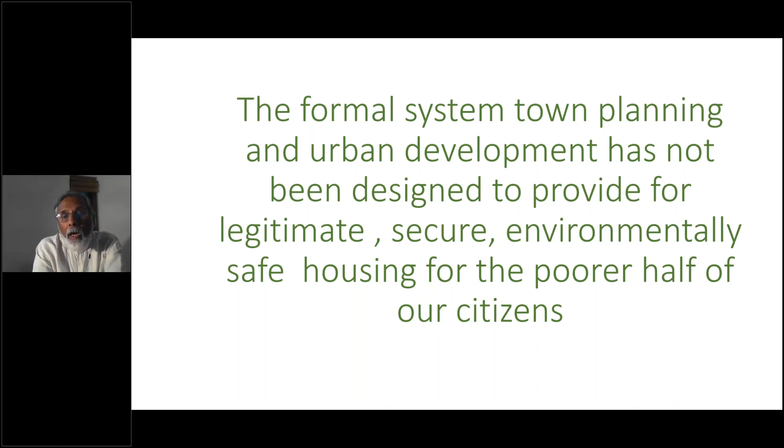Now, what's happened historically is that our formal system of town planning and urban development has not been designed to provide for legitimate, secure, environmentally safe housing for the poorer half of our citizens, a large proportion. And so we say there's a housing shortage. And the issue is, how do you make it affordable for people with very little income?

Most of the shortage in housing, where there's not adequate or proper housing, where people are living in bad circumstances in slums, etc., is amongst the bottom one-third of the economic pyramid of society. And the lowest in that pyramid are the worst sufferers. So here's an issue: you have to reach the threshold of affordability in your solutions. And that's where the bulk of need for housing in our cities still persists.

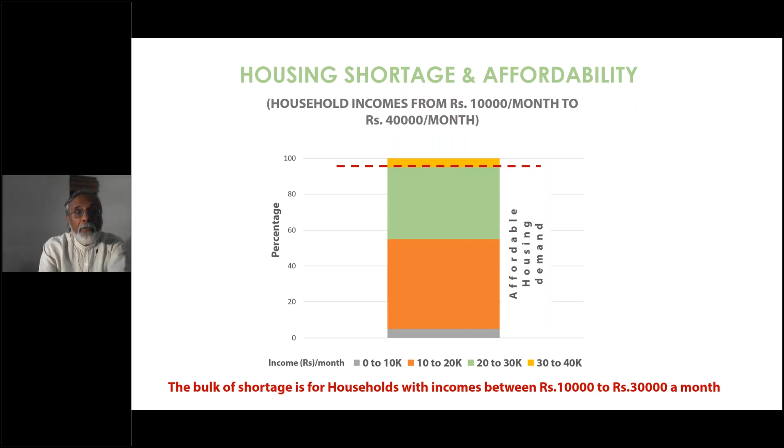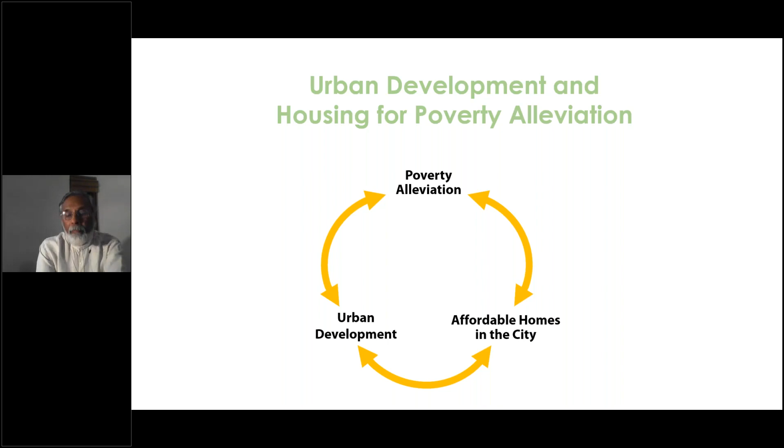Now, let's not forget this. This is extremely important. If we are talking of urban development and housing, the two together are meant to be a solution for poverty alleviation. These are interlinked processes, where urban development, which provides affordable homes in the city, will produce poverty alleviation and greater equity in our social fabric.

Nothing is affordable in housing unless it has an advantageous location and it has a live-and-work affordable shelter provided within the fabric of the city. Once you have that, then you get efficient economic processes, you get a rapid distribution of wealth, and that results in poverty alleviation.

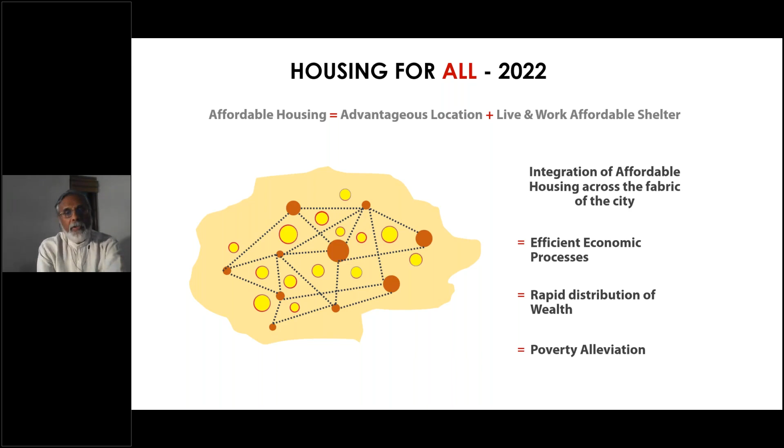So we should now say that if you can take care of the cost of land and building—land is a big issue, I'm not going to talk about that today—and if you can be careful in the use of your resources, whether it is land, energy or materials, and you can make things in a low carbon manner, whether it is the use of materials or the transportation of the city, that is when affordability and sustainability become complementary. That is my assertion. A combination of resource-efficient and low carbon construction with compact urban morphology is what produces affordability, and low carbon city transport produces a low carbon and affordable urban system.

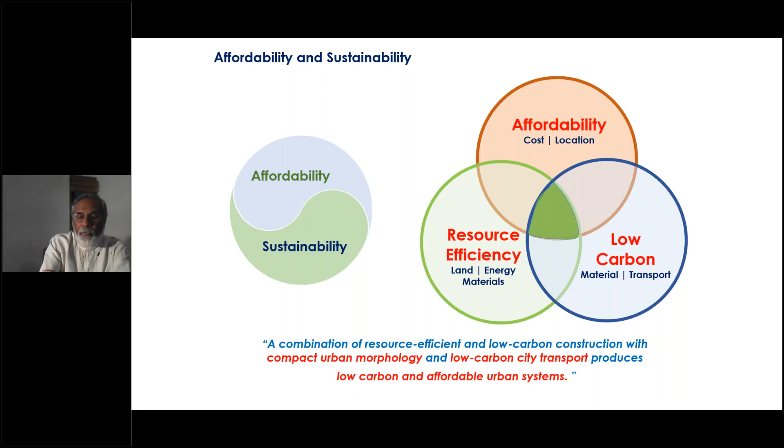Now, there's a big debate going on in our part of the world, and there's a move somehow—people think that we have to go high-rise. Everything has to be high-rise because our land is short, and that's modern. But we thought, oh hold on, let's have a look at that. So we did some research, looking at low-rise affordable housing, medium-rise affordable housing, and even high-rise buildings which are supposed to be affordable, but they're being built in the name of affordability. We looked at real projects and analyzed them thoroughly on different parameters.

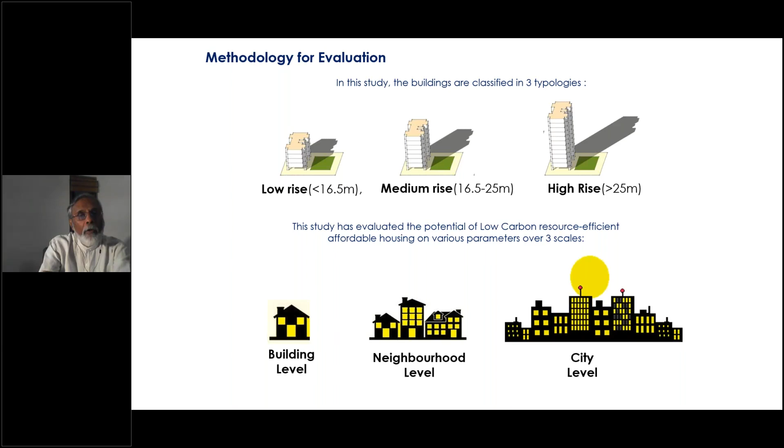So here's an interesting one: if you look at the embodied energy intensity, there are 233 units of embodied energy per square meter in a 4-story or 5-story building, versus 310 units of embodied energy in a tall building, say 12 stories tall. So you can see, as you build taller, you use more steel, you have to resist more earthquake forces, wind forces, and gravitational forces, and it becomes much more expensive in embodied energy terms.

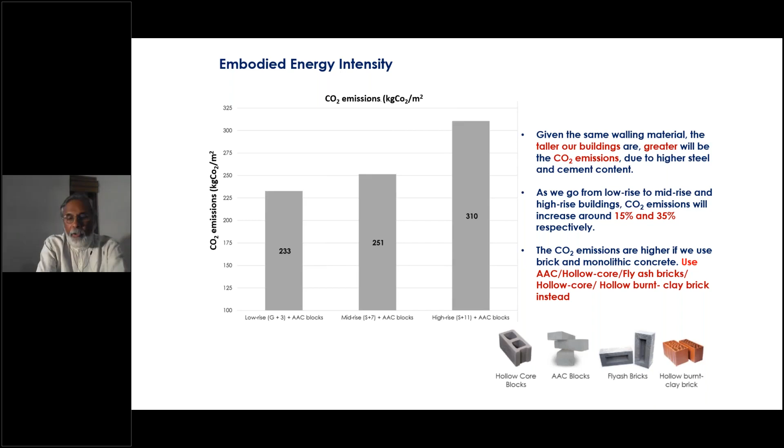Higher carbon dioxide emissions as you go taller. Operational energy—well, as you go taller you become dependent on pumps and lifts much more, and also on fire safety systems. So the cost of operating a building, just to make it work, is 4 to 5 times higher if you're taller, as compared to a low-rise building which is 4 to 5 stories high and walk-up.

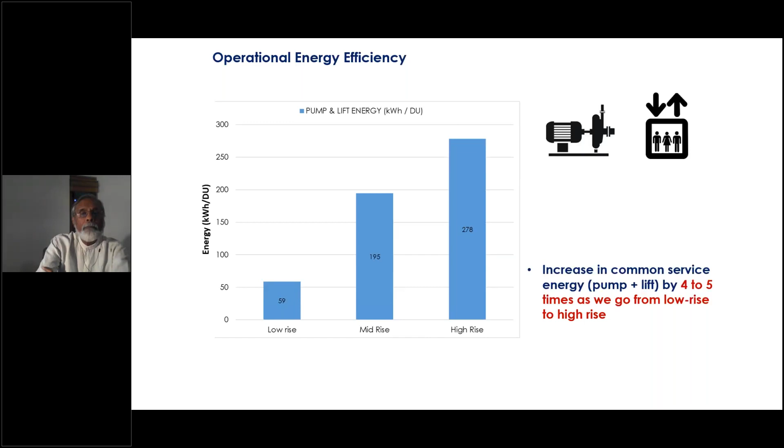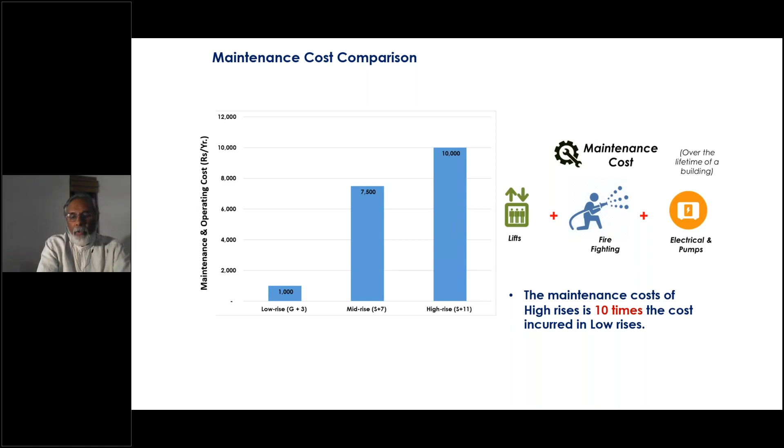So here we are: operational cost of energy goes up, again higher carbon dioxide emissions. What about maintenance cost? Well, as buildings age, you can look after a low-rise building easily, but tall buildings, with all the complex systems and difficult access on the outside of walls and windows, are much more expensive. So maintenance expense is much higher when you're talking about high-rise buildings.

And this is the real nugget: think of 4 to 5 story high buildings with a rooftop which has cleared the tree line and is now open to the sun—plenty of sunshine in our part of the world. Now, the calculation shows that if you can give 60% of your rooftop to solar PV, 80% of your annual energy demand can be met by that solar rooftop PV system.

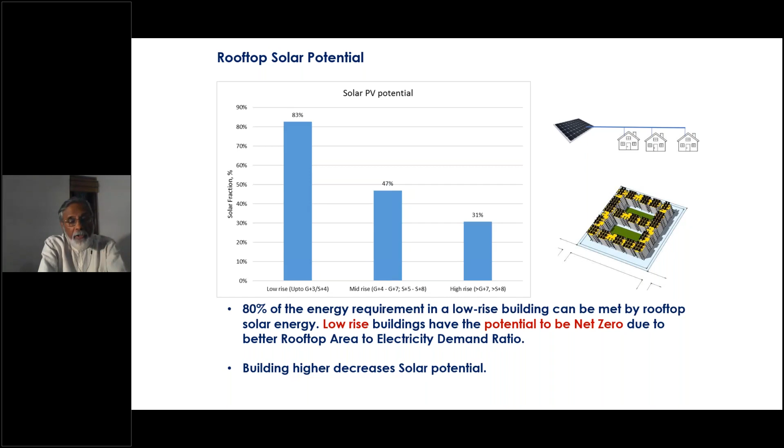And of course, as you build taller and taller, that ratio becomes less favorable. If you go very tall, you can't possibly meet more than 30% of your energy demand with solar PV, and of course your energy demand also goes up as you build taller. So this is a very important thing—it's a hint that here's an urban fabric, 4 or 5 stories tall, clearing the tree line, giving access to solar energy production, solar PV-based energy production. You have a potential solar city format.

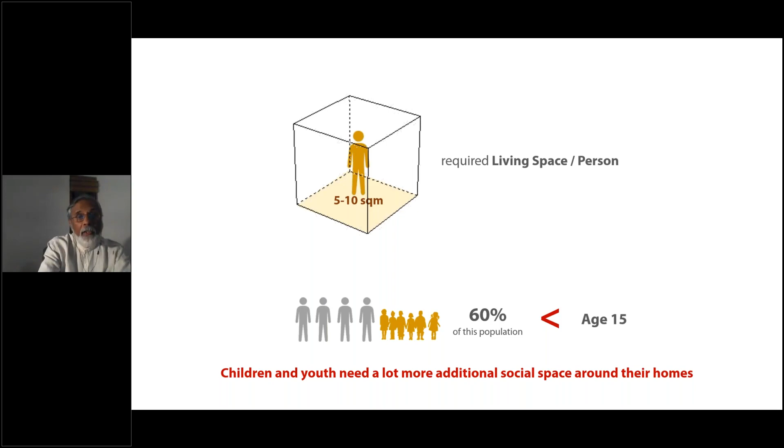Another very important thing in our part of the world, in many developing countries too, most of our people are below the age of 15 today. 60% of the population is like that. This young population, as it is growing, needs more space immediately outside the house, not necessarily within their homes. You can't afford a big home because it costs a lot to build, so you have a small home, but it becomes livable if you have access to livable outdoors, whether terraces, balconies, gardens, or streets. Go to the rooftop, go out onto the street and garden, you have the access. So socially, from the point of view of our demography, there is a great advantage in low-rise, high density.

When you put all of these factors together and do a comparison, whether it's open area per person, embodied energy, operational energy, solar rooftop potential for solar PV, construction costs, construction time, and most important, at the bottom of the list, disaster and breakdown resilience. Who wants to live in a tall building if there's a big earthquake, a fire, an electricity failure, or water doesn't come? It's really not a sustainable way of living, not the positive, desirable way of living. The real answer is to optimize with 4 to 5 stories.

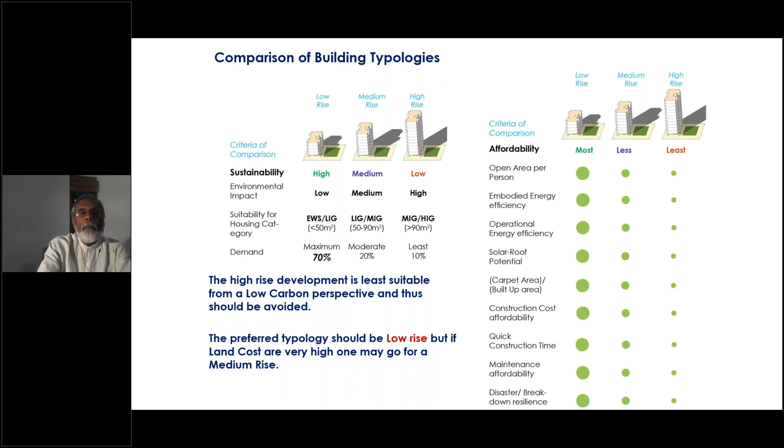So if we talk about the DNA of a low carbon, affordable city, the DNA is low rise, 4 to 5 stories high, high density. For small homes, this works very well. You can get very good densities. The construction cost is marginally higher than building small homes, say 1 or 2 stories high. Excellent solar potential, and very important, look at the bottom of this list: it is the best opportunity for the distribution of wealth through the construction process, because the grain of development, the size of each project, is relatively small. Many more people with simpler skills and smaller contractors can participate as compared to the big, high-rise type of construction industry. So here it is, this is the DNA of a low-carbon, affordable city.

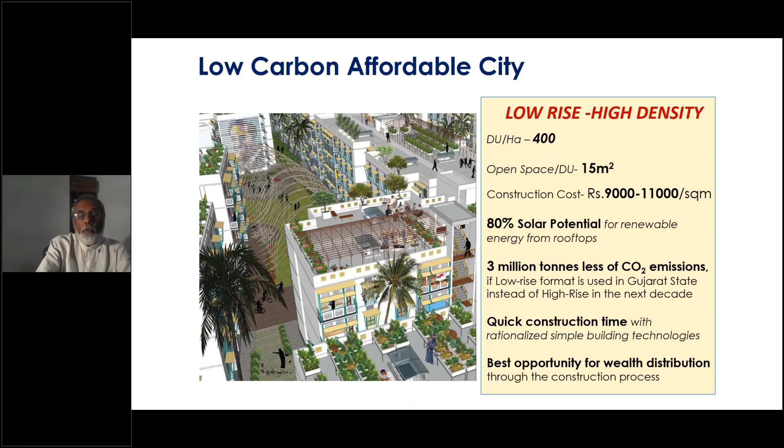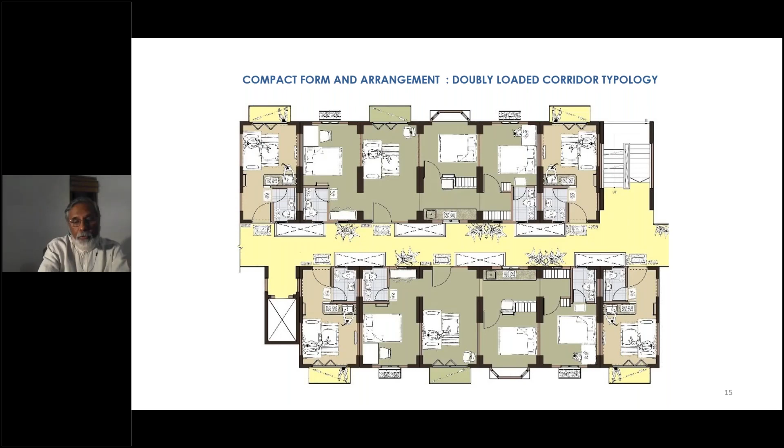Now let's move on to the making of the house itself. Group housing is the answer. Compact group housing, compact form and arrangement, is a way of economizing, sharing walls, reducing the perimeter of the building in relation to its floor area, and managing that architecturally really well. Here it's a system of a doubly loaded corridor where you have adjacent bays which can be connected to one another. You can have 1-bay, 2-bay, 3-bay, 4-bay homes according to demand, and this can even change over time. Very flexible, very simple system, but really, compactness is the solution here. And you can try other variants of this.

This is a project that was built in Chennai. Here's a solution where the passage in the middle, around which you have houses on either side, is like a street up on the third or fourth floor. Along the street, at one or two locations, there might even be a lift, an elevator, so that in case somebody is very ill, very old, or passes away, there's a dignified way of vertical mobility. Very affordable, but here's a solution for making vertical mobility also affordable. Once again, don't forget, compactness is the basic principle.

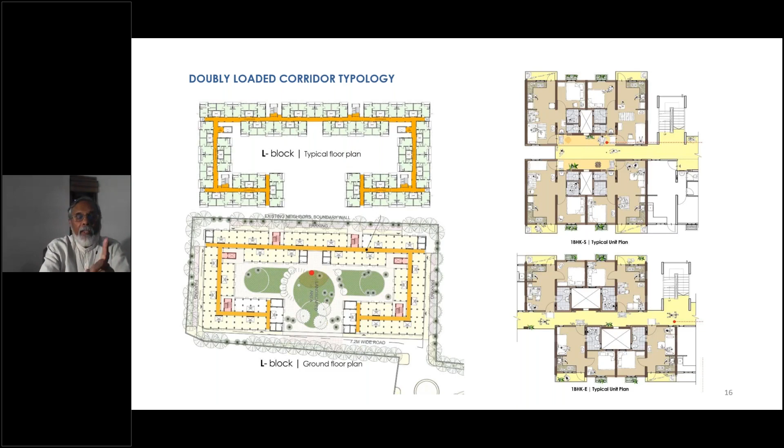Another principle in all of these designs is that you're going to start with a small home today, but tomorrow, as your income improves, you might want a bigger home. Even the family dynamics change. You start off as a young couple, and the family grows. Then parents might want to come in, household size increases. Then, as you retire, children go away, once again the household size shrinks.

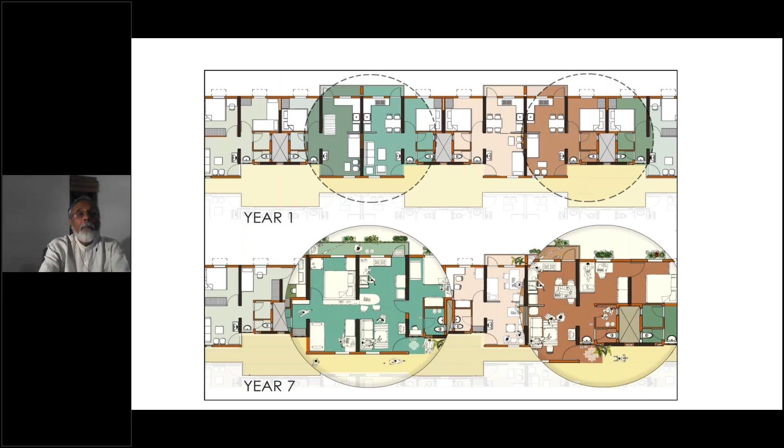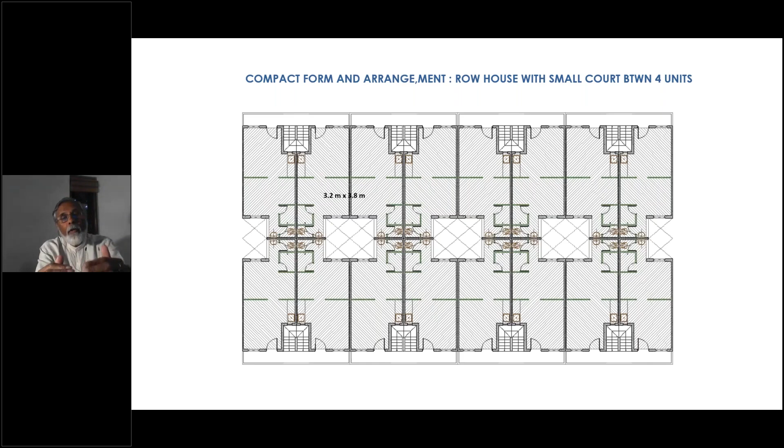Another system that was doubly loaded corridor, stacked 4 to 5 stories high. This is walk-up apartments, stacked 4 to 5 stories high once again, but here it is a row housing system. Again, see the compactness and the sharing of walls produces economy. In this case, you are stacking them back to back, one set of houses facing in one direction, another set facing in the opposite direction, with the courtyard in the middle to provide light and ventilation. This is also a very good compact method, and you can try many variants of this kind of method, depending on the size of house. Once again, the structural system can be so designed that you can borrow and steal and exchange adjacent spaces from the next house.

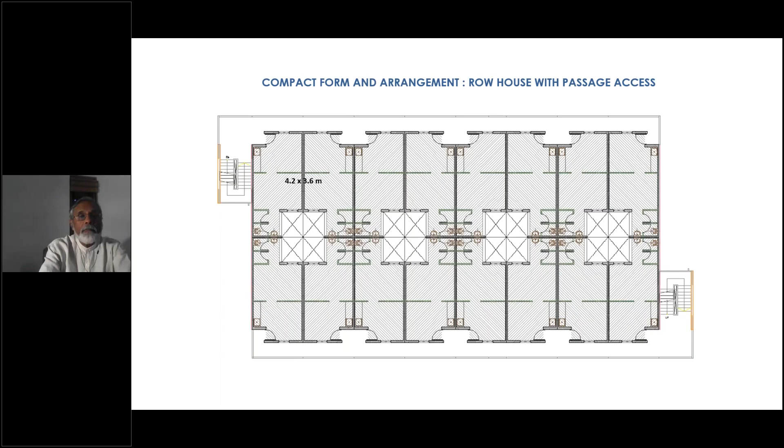One great advantage of compactness, especially in climates like India where it tends to be very hot for most of the year, is that you need to be protected from the outside elements. Compactness leads to better protection from the outside, makes insulation on the outer walls simpler to achieve, so long as you provide sufficient ventilation through your spaces. This compactness reduces the demand for cooling or heating in the annual cycle. So compactness, from a climatic point of view, is beneficial, and it also reduces cost at the same time.

It is very important that you optimize what we call passive design strategies for climate conscious design, because that will reduce your future demand for air conditioned comfort. If you don't take care of it, that demand is going to increase exponentially, and you will have huge summer peak loads which our electricity supply systems will not find possible to meet.

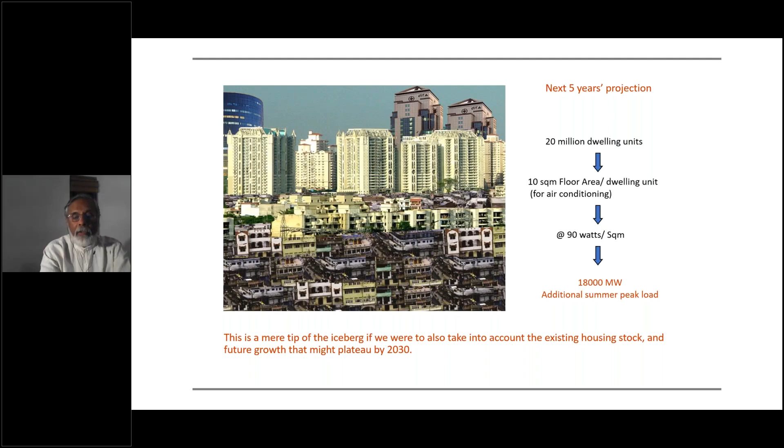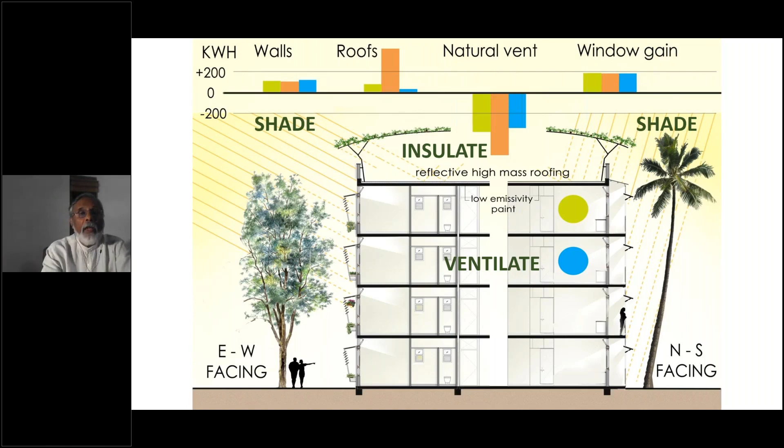So here's the rule of three for passive design: shade, insulate, and ventilate. This is for warm climates, of course. Shade, so that the sun doesn't come directly in, and so that the impact of the sun on the roof or walls is reduced. Insulate, definitely insulate the roof, maybe insulate the walls too, especially the walls facing the rising and setting sun. And allow for ventilation right across the space, so that when it is pleasant outside—in the evenings, early mornings, through the night, or during pleasant seasons—you can make the house relatively transparent, allowing the breeze to move through and bring the benefit of the outside environment in. A very simple rule, easily followed, but you have to pay attention to it.

Here's the project in Chennai I was earlier talking about, where most of the building blocks, following the doubly loaded corridor principle, face north and south so that the impact of the sun shining on the walls is reduced. Very little of it is exposed to the rising sun on the east and the setting sun on the west. But not all of them can achieve that ideal—some face the wrong way, unfortunately, due to the nature of the site. So what do you do?

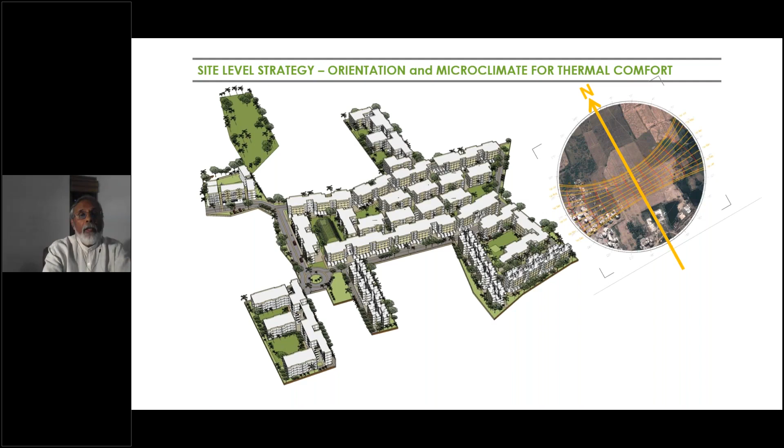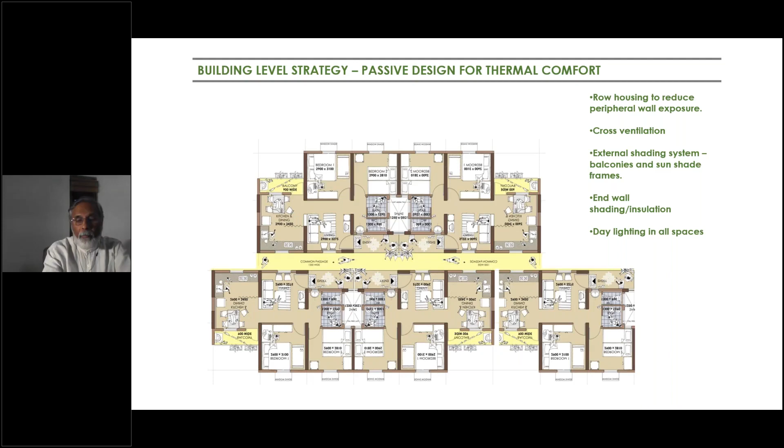Well, first you follow the principle of compactness. Second, make sure all the windows and balconies are properly shaded from outside, not from inside. Design of windows is probably the most important thing, which nowadays, in the name of modern design, is being ignored—sliding windows without any shading protection outside. If the windows can be subdivided into two or three components, so much the better. You open them according to your need, the nature of the day, the climate, or the season, and make it lightweight, so that the sun intercepted by the window shade system does not heat up so much and does not transmit that heat into the main fabric of the building. That's a principle to remember.

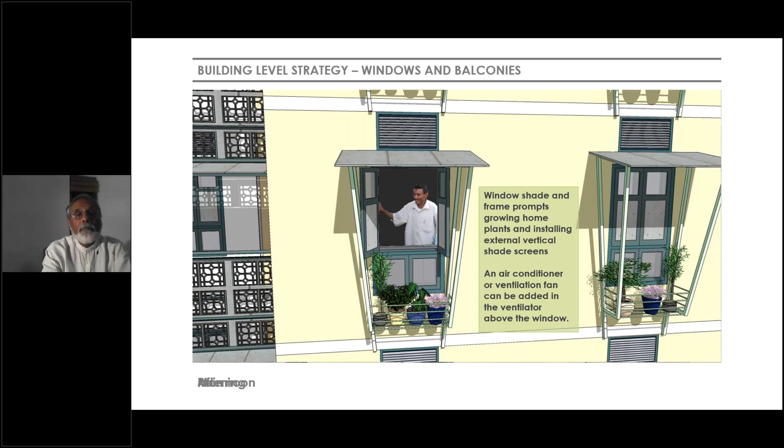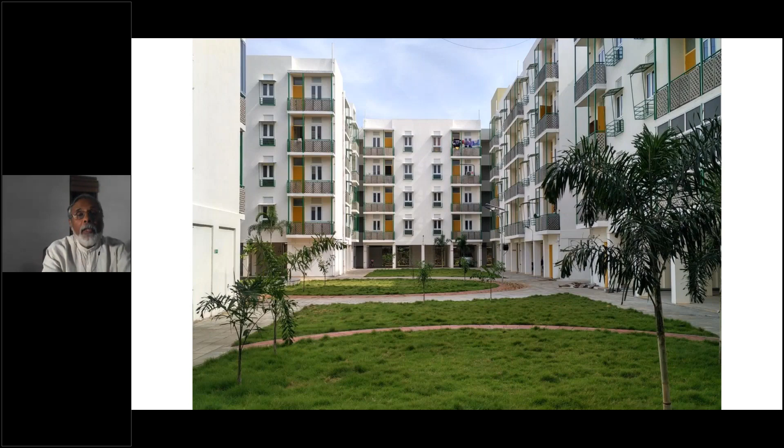Here's a project that was done. Notice the slender frames outside the balconies and outside the windows—can you see them? All windows have these little frames outside, and all the balconies have these little frames outside. This is what these frames allow you to do: very low cost, very simple, but it's the framework on which you can hang any kind of shading system, which can be variable, and you can operate it yourself. This allows you to take care of any orientation. If you happen to be facing southwest or even westward, with shading systems like this you can protect yourself from the afternoon sun, and raise it up during the daytime. So a simple device like this goes a long way in providing low-cost passive design for comfort.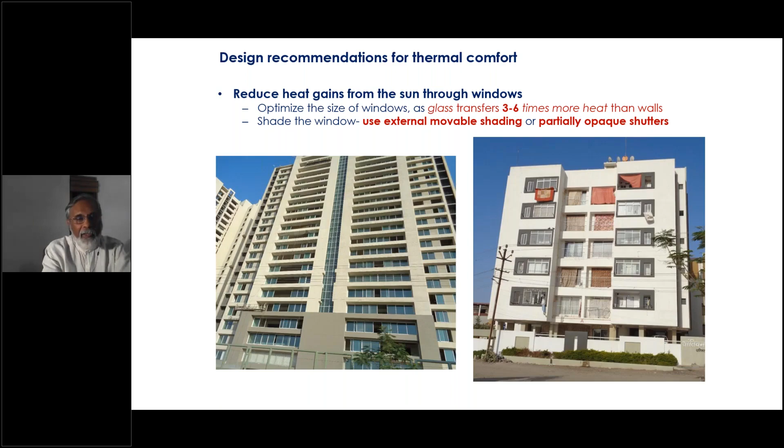But this is what is happening in the market. So talking of building sense now, some of us in our profession of architects are producing this sort of nonsense. So I'm appealing to all of them: just watch yourself. In the name of modernity, of fashion, watch yourself doing this. This is totally anti-social, anti-environment, and not something that is going to help us move away from climate change.

Insulation of walls is easily possible, and it's been done in this low-cost housing project in Gujarat, within the budgets that were permissible in a governmental project. The roof also is insulated here.

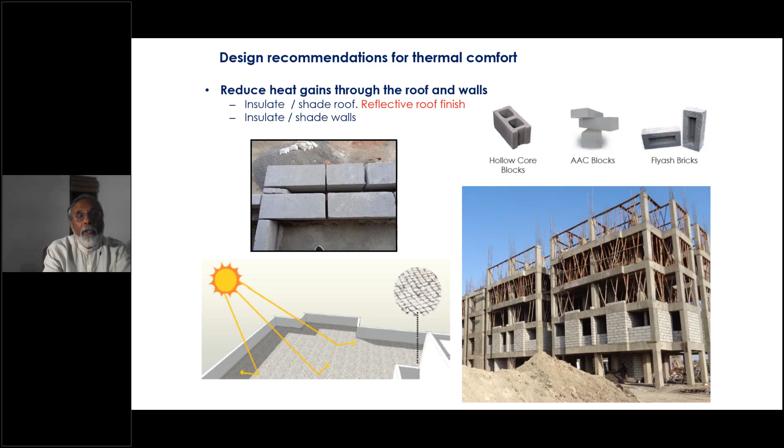Now we move on to something else very important.

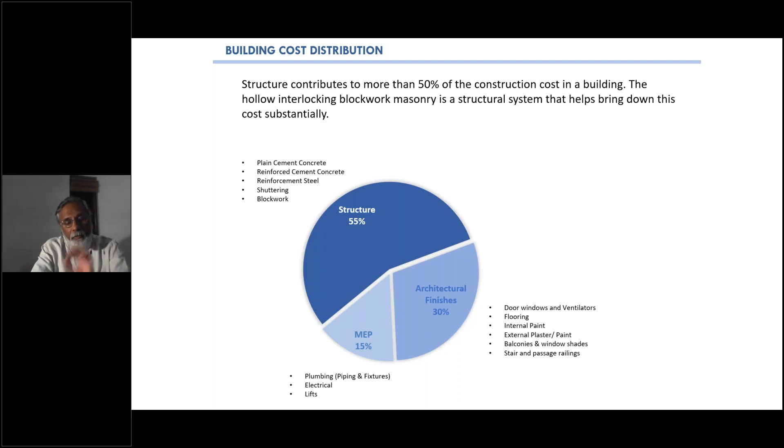About 55 to 60%, or even 65%, of the total cost of simple buildings is accounted for by its structural system. If you want to save cost, make the structural system really efficient. To do that, reduce the quantum of steel consumed, reduce the steel intensity of the structural system. That's the key. You reduce the steel intensity, you reduce embodied energy, and thereby you reduce the carbon dioxide emissions in the construction of the building substantially, because steel is a real culprit.

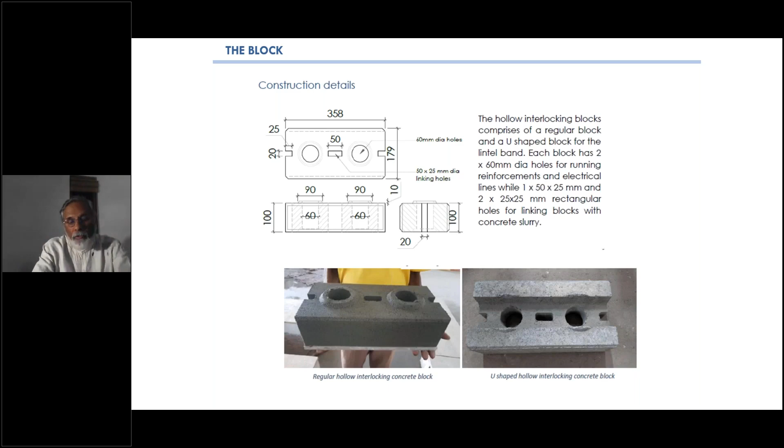So here's a very simple device, which has been devised for a project that is supposed to happen in Tamil Nadu again: an interlocking concrete block. You can design the concrete strength according to how tall the building is going to be — a stronger block for low floors and a lighter, less strong block for the upper floors. It interlocks like this, and you assemble this interlocking system very, very swiftly.

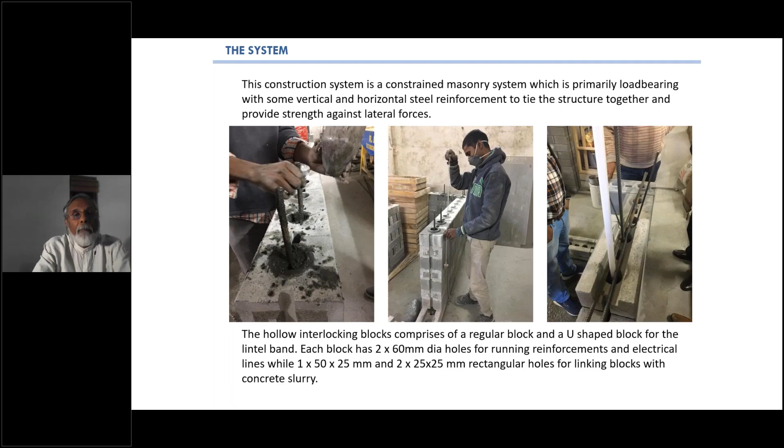Occasionally, in the hollows that are vertical, you can place some reinforcement. This reinforcement leads to what we call confined masonry. Confined masonry simply takes care of any lateral loads that occur due to wind loads and earthquake loads, while the vertical gravitational loads are taken by the load-bearing blockwork masonry. So this is the system, the way it works. Very little steel is consumed.

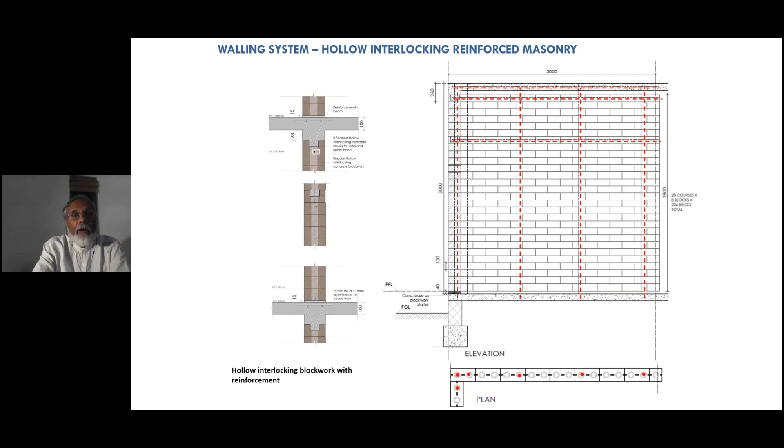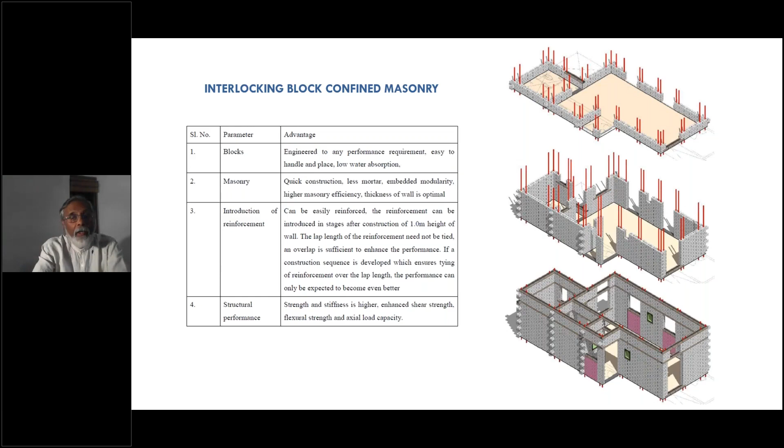We have built prototypes with this kind of construction, and we have found — you can see the process of construction, how it goes — that you can do floor to floor in about a 10 or 12 day cycle, which is really quite quick given our kind of construction. If you're building 4 to 5 stories high, this really means that within 7 to 8 months you're done with the total building.

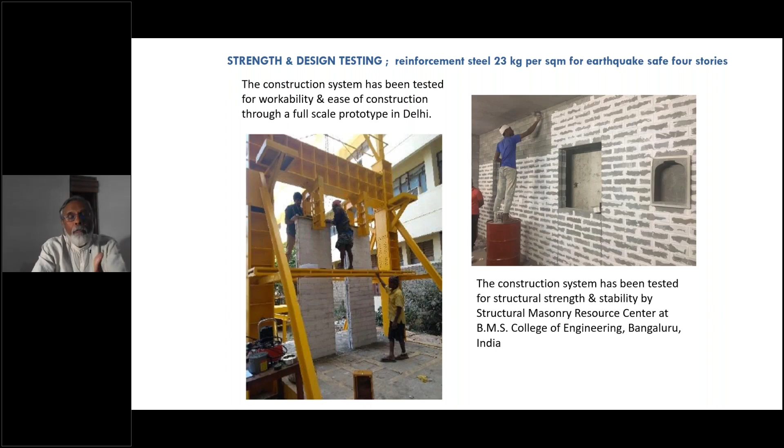But when it has been tested in a lab, the entire system has been tested, and what we're able to establish is that you don't need more than 23 kilograms per square meter of built area of reinforcement steel for earthquake-safe 4 stories high construction. Very low embodied energy as a result.

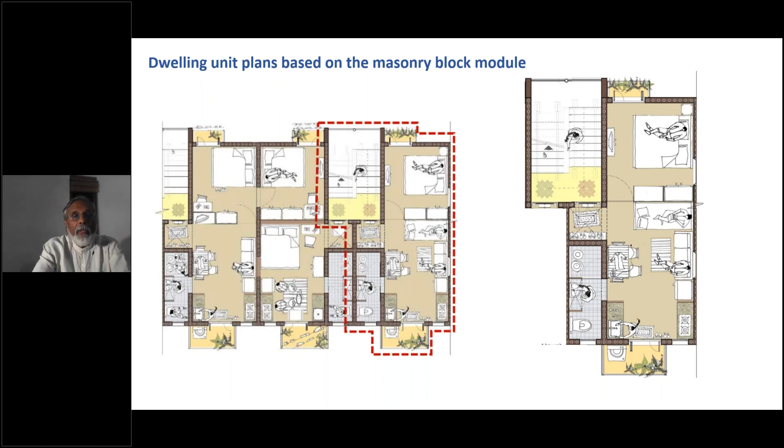And because the unit of this block is small — only 30 centimeters long, or 34 centimeters depending on the thickness — this unit is small enough for you to work out different kinds of housing layouts, different sizes of flats, using this module of construction. Here is an example of how you can arrive at different kinds of housing blocks. This is like a precast industrialized product, very low investment in its production, but very versatile, and it increases productivity enormously and is also materially very efficient.

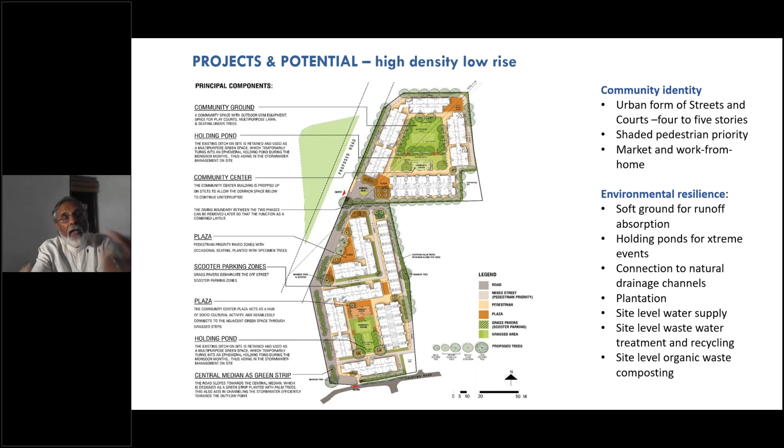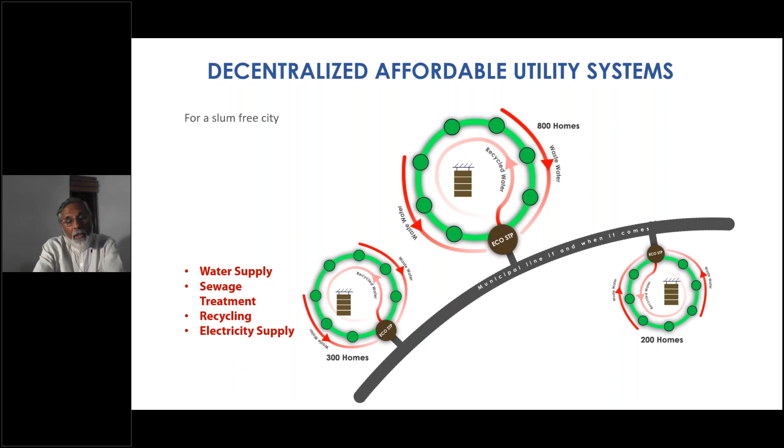And you can have site-level water supply management, site-level wastewater treatment and recycling, site-level organic waste gathering and composting that can be recycled into urban agriculture too. So with decentralized utility systems of water supply, sewage treatment, recycling of water, and even electricity supply with solar PV now coming in, this is the future of urban housing which is affordable. This can then be connected to the main trunk of the city when it becomes available in the future. These technologies are available and they're actually being implemented.

So, affordable housing challenges this: you have to reach the threshold of affordability according to what people can pay for today. There's an equalized monthly installment that people can pay — so many dollars per month, or so many rupees per month — and you have to find a solution within that. You have to look at the home and the neighborhood together, and in such a way that they provide the base for the aspirational range of the future, where people will find education, health, leisure, and commerce in the housing environments also.

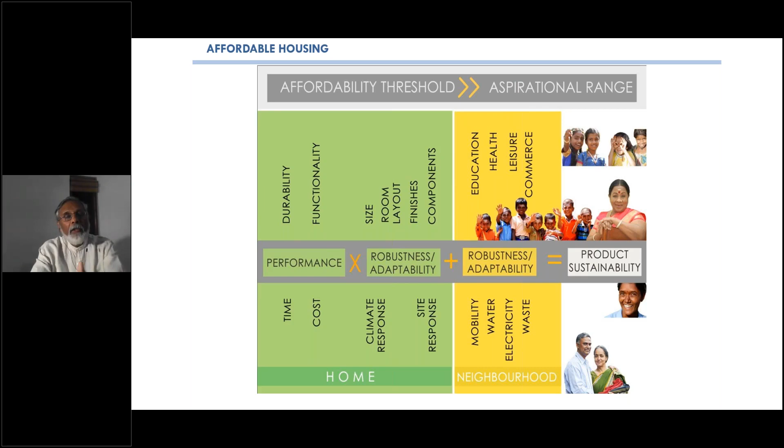And this, my solution of the DNA of low-rise, high-density, is the solution for the future, in my opinion. It is about inclusive construction economy. It gives you resilience in urban living. It gives you environmental security, and it is the building type that has the minimum operational energy, with built-in resilience against extreme events. That's the solution for the future. Thank you.